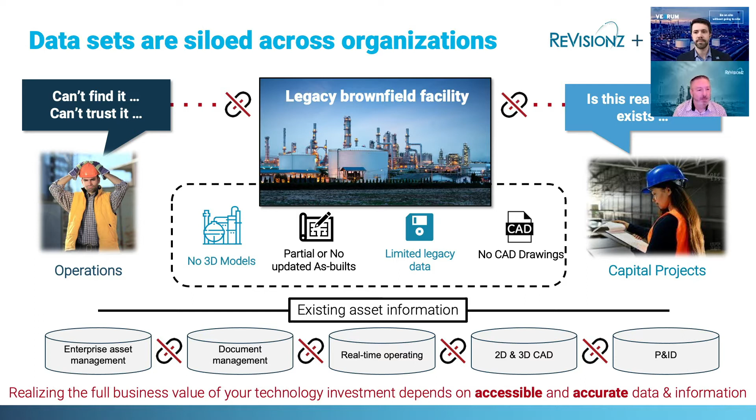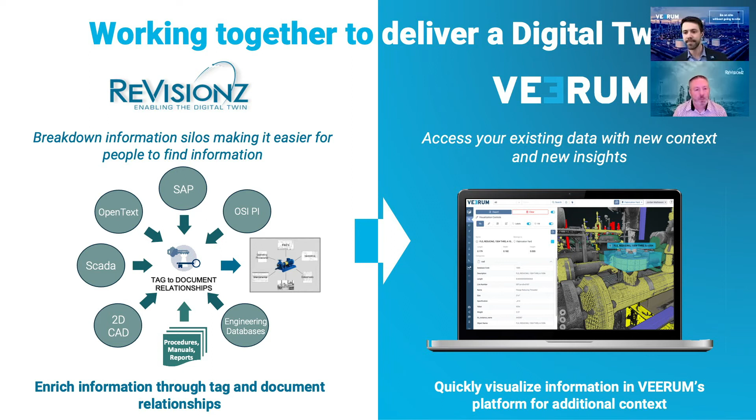Thanks, Alex. So just a couple more slides here, and then Alex is going to give a demonstration, and then we'll finish up with that delivery approach as we've mentioned earlier.

But I just wanted to talk about creating that rich digital twin. In a lot of cases, when implementing new technologies, a lot of companies are conscious of that change to people in their organizations, be it business process change, training to people, their systems or infrastructure, and so forth.

And also in some cases, companies fear, do I have to move or migrate my data to support this new system, right?

So again, I think we've all been part of data migrations. Some experiences are good, some maybe not so good.

The intent of this solution approach is to focus on leveraging your existing digital information or digital investments on your current information repositories, minimizing that change to end users, avoiding that data migration.

With that being said, the ability to unlock the value of your information still requires some work in order to bring it all together and present it back into that VEERUM platform.

So there is an element of having to go through and mine and rationalize that existing data. Where does that existing data exist? How to extract it? How to associate and rationalize those tags across business systems, as they may be described slightly different.

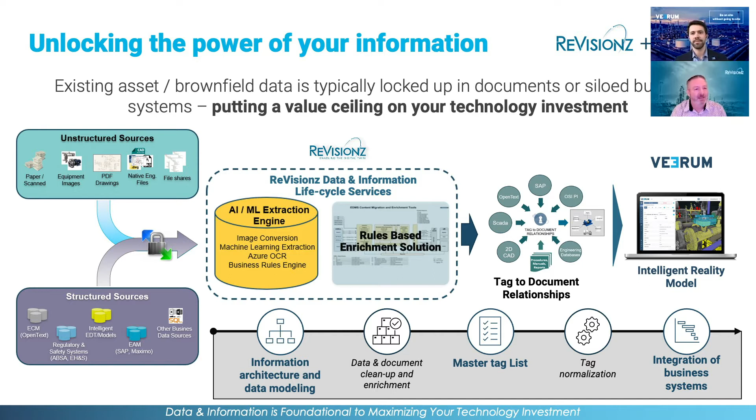So with that being said, let's see what this tool is, what this solution is. Let me pass it over to Alex to demonstrate how he's bringing all this great stuff together.

Alex: Now we've learned a little bit about how we can aggregate data from different systems, elevate that information, and use different AI and machine learning tools to extract the metadata and tags out of these documents. Now it becomes a question of how do we actually connect all of that rich information, which typically lives within document management, enterprise asset management, or real-time operating systems, to a visual model of the plant.

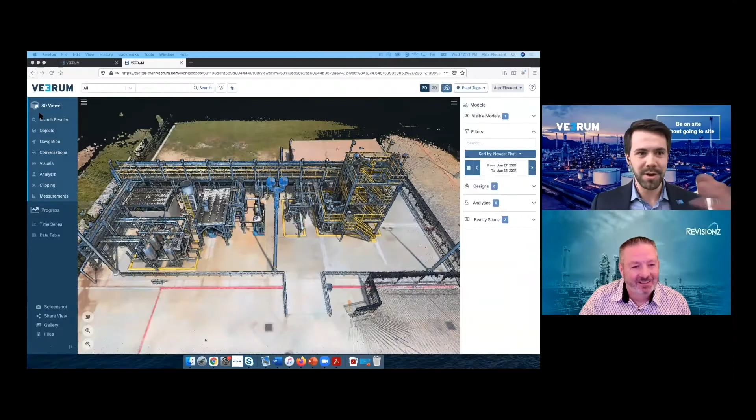So here, I'll escape my screen and show a little bit now. We've extracted all of this information from your document, we ingest your tag list. How do we go about matching all of those tags to related assets or objects within the digital twin?

What I want to show here is a laser scan performed of a water treatment plant, and it's colorized so you're able to really visualize that asset to a high level of detail. This particular data capture was performed using a mobile mapping device. These kinds of devices can scan an entire site in about 30 minutes, and it can be done by non-survey subject matter experts.

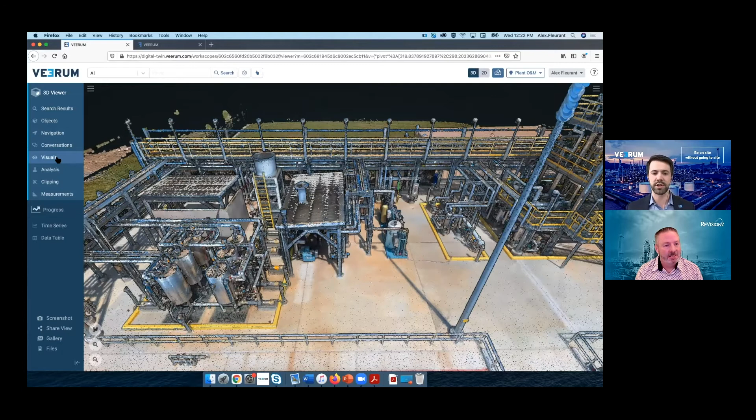So there's really been some great advancements in reality capture technology to support all of these business objectives. What I'll do here is start looking at what we can ingest. The output from that ReVisionz service is a master tag list, here are all of the equipment pieces that we have for this particular asset.

What I can do is actually search by equipment type. Let's say as a maintenance planner or an operator, I specialize in mechanical equipment and want to find all the information related to pumps. So here I've created a search, and now I can see all of the pump tags that show up within this model. There's 17 pumps related to this GU1, glycol unit 1 work scope.

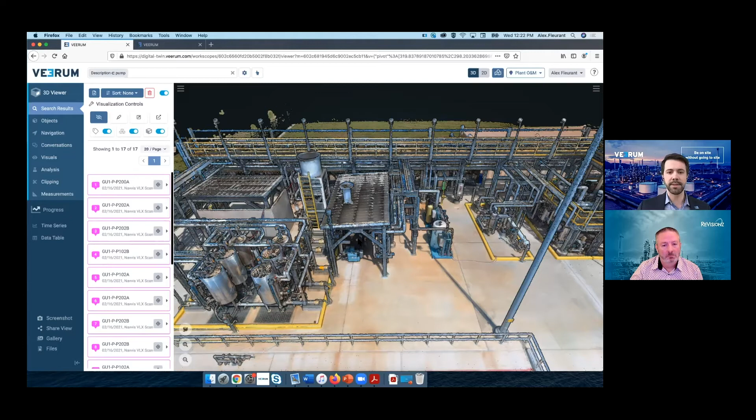Over here I'll zoom into some of these pumps, and we can see that there are pumps here. It's a reality scan. Now what we want to do is start matching each of these tags and objects to the related locations within the virtual model, really advancing that building information model.

So I can click on any of these tags and then get all of the related metadata that comes from SAP or your tag list or your enterprise asset management system, really making that truly accessible and easy to understand for the team. Typically, how we envision this with our clients is crowdsourcing all of this information from your operators and maintenance planners who know that this is pump 201, this is 202, this is 203. But how can you verify that information, or even get non-subject matter experts of the plant, such as myself, to actually start matching these tags?

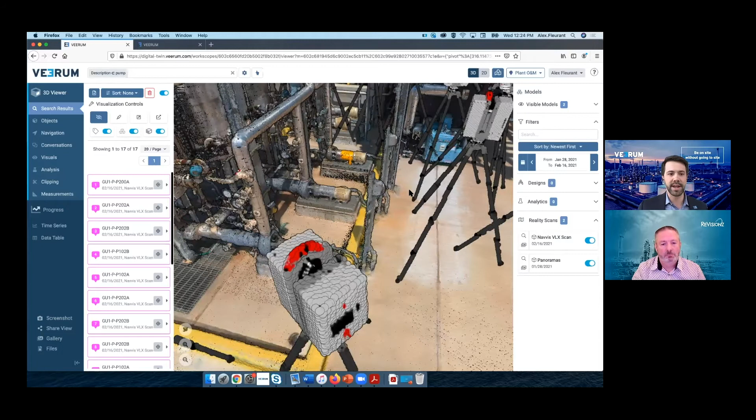So here, as we generate scans, we also generate 360 photospheres. I'll click on one of these scan positions, and we'll be able to access the 360 image from that location. Looking at these pumps, I can see that the pump on the left is pump 201A, and the pump on the right is pump 201B. So I've just got that context.

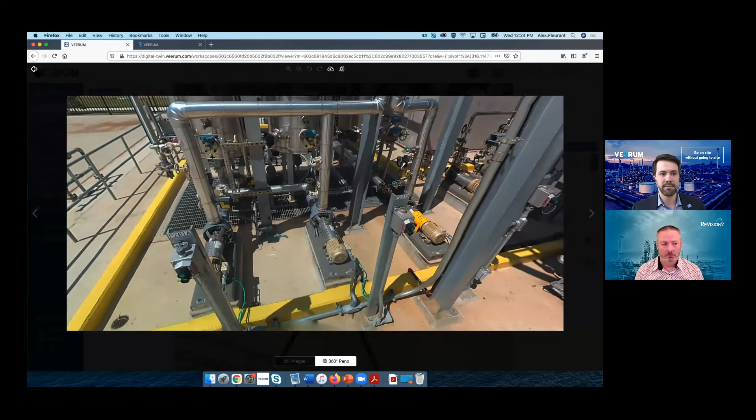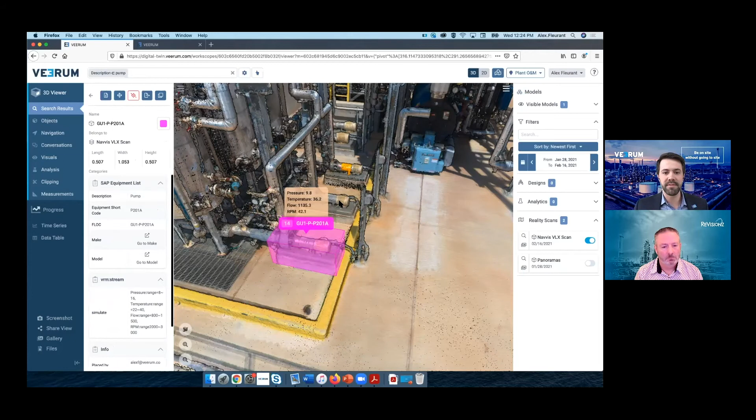I'll clear these panoramas and go back to our tag list to get back to that description, pull up our pumps, and we said 201A on the left and 201B on the right. So we'll find those tags. Again, we can search for these numbers to make it really easy. Here's 201A. We simply select that object, confirm that's where we want to place it, place the object, and we've now connected 201A. I now want to connect 201B, so I'll go back to the list, find 201B, select that object and place it.

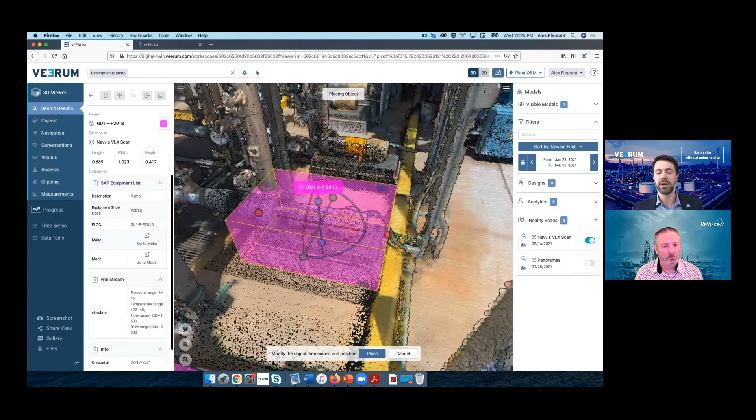Update these dimensions. We can ingest the dimensions of those equipment tags from your system of record. SAP often has dimensions, so we can pre-populate each of those, and again, place that onto the scene.

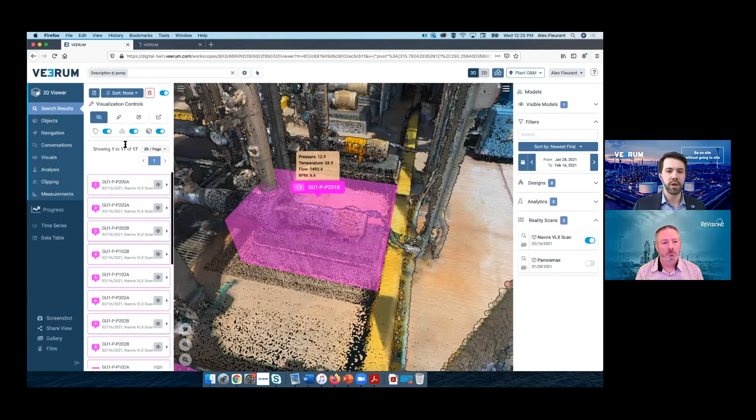Similarly, any other tag or component can easily be matched to a unique geolocation within the virtual model using that exact same workflow. So really what I wanted to show here is we just matched two tags. I can match a third one here. So I know that beside 201A and 201B is 202B. I simply select that object and place it.

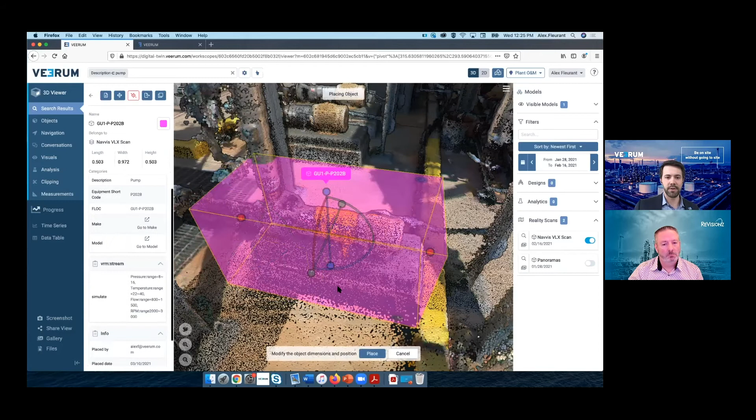And again, what we're really targeting is less than 3 seconds per tag or per object, and really enabling anyone within your organization to take the knowledge that's in their head, knowledge as to which pump is which, and really codify that and build it into the virtual model so it's accessible to everyone, and so that it's fully integrated with your enterprise asset management systems.

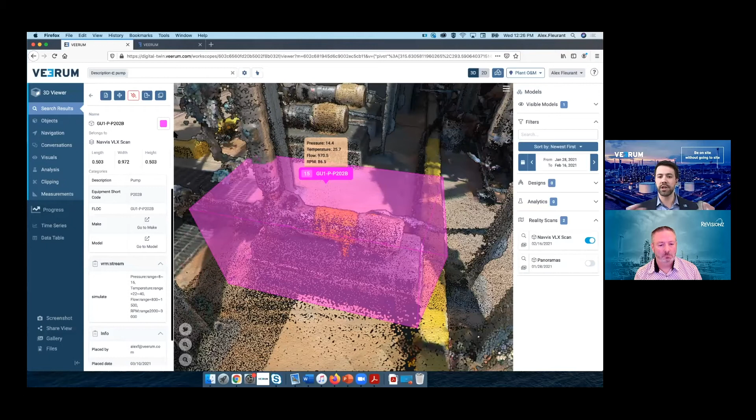The second thing we can do is create sub-hierarchies. So what we can do is create a hierarchy where people, maintenance planners, operators, would match equipment tags to related assets or pieces of equipment within the virtual model, and have some sort of QA/QC process to verify that these have all been matched to the right location, then publish that to a master model, which is accessible to the whole team, that is trusted, verified, and validated at scale.

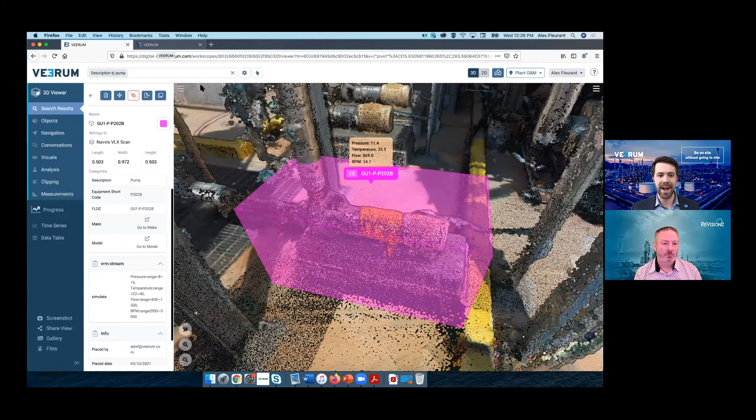So let's fast forward a little bit and see what this looks like for the same plant once all tags are matched. Same plant here, but in this particular work scope, all of the tags have already been matched. So what I'm going to do here is start looking for information.

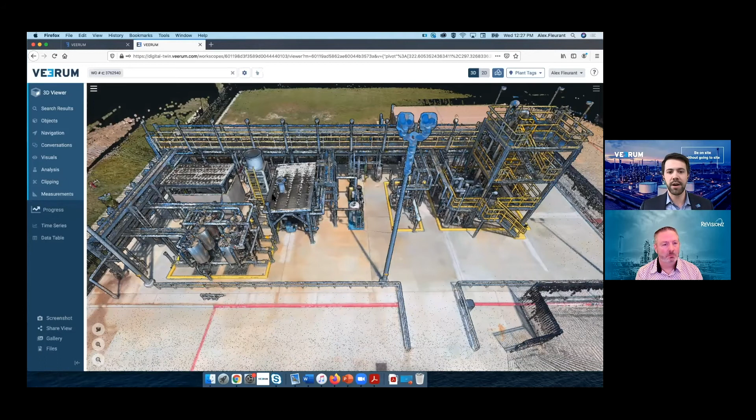So what I want to find, I'm a maintenance planner, I'm about to go out to site, and I want to find a particular work order. So I'm looking for work order 376-2940, and I've just found that work order, and that work order is matched to a tag. So I'll click on that particular tag, and you can see that the work order actually relates to this particular compressor.

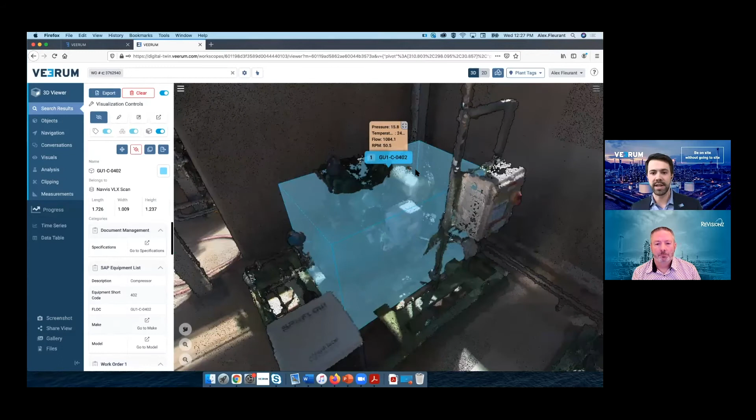And you can see all of the data from document management. We can go to our document management system, so we can create hyperlinks with your systems of record, get all the PDF documents, P&IDs that may exist. This could be OpenText, UDocs, SharePoint, whatever system you may use. And then similarly, pull all of the data from your SAP equipment list, link back to SAP.

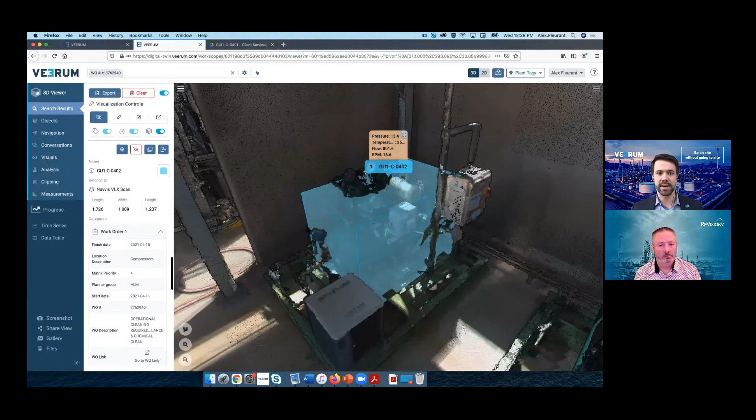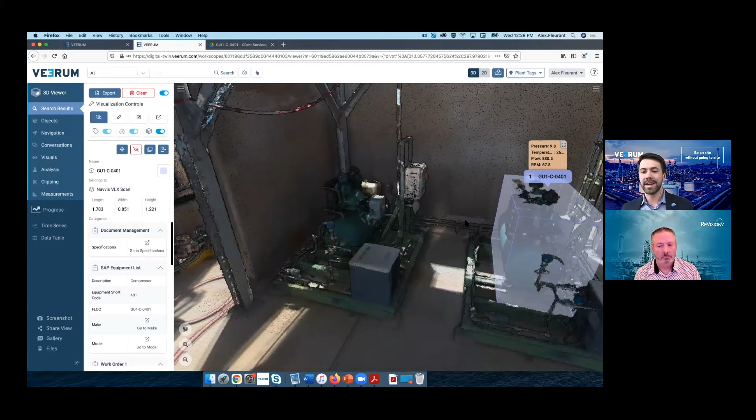Pull all of your work orders from SAP plant maintenance, link back to those work orders, and then you can see all of that particular information. If I wanted to learn a little bit more about all of the surrounding equipment inside the model, I can simply click on any of these pieces of equipment, and I can get the exact same information related to equipment, document management, work orders, or any other information that has been connected in relation to that tag.

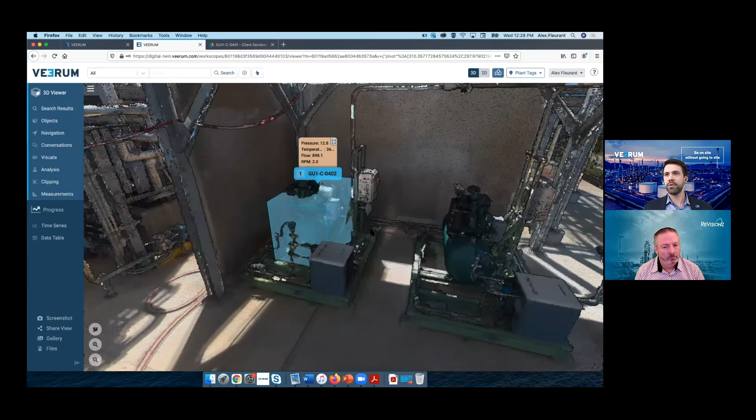So going back to the work order maintenance planner use case, I need to go execute this work order, which is related to operational cleaning that is required of this particular compressor. So now I can actually do all of my planning virtually without actually going on site, and I can really navigate this entire plant from the comfort and convenience of the office or the home office.

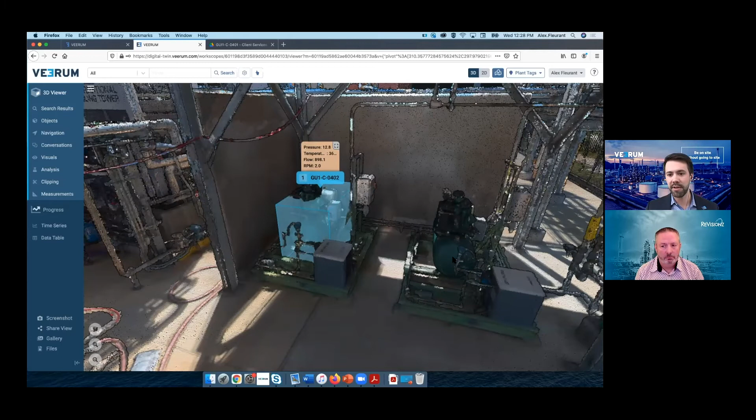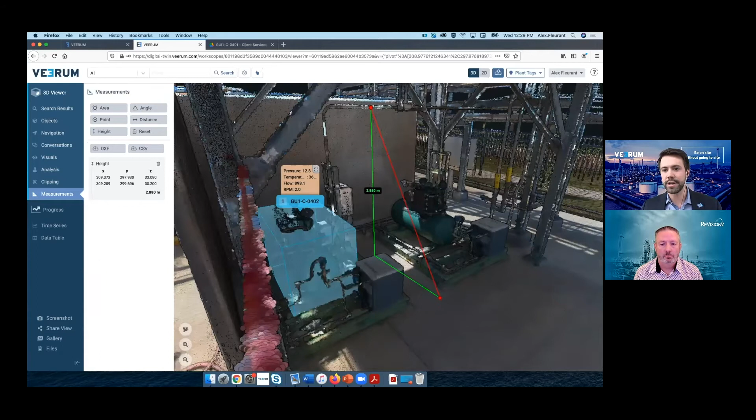As an example, I can start measuring for clearances. So maybe I need to plan for mobile equipment access requirements, and I want to make sure that I've got over 2.5 meters of clearance to bring in particular equipment. Here between this small bore piping and conduit and the ground, we've got about 2.8 meters. We've got some sort of two structural beams over here that are about 2.4 meters apart.

Again, we can do similar clearance measurements and the likes, the type of stuff that maintenance planners would typically do in the field. We're really providing the tools to make that information accessible to people from a remote location.

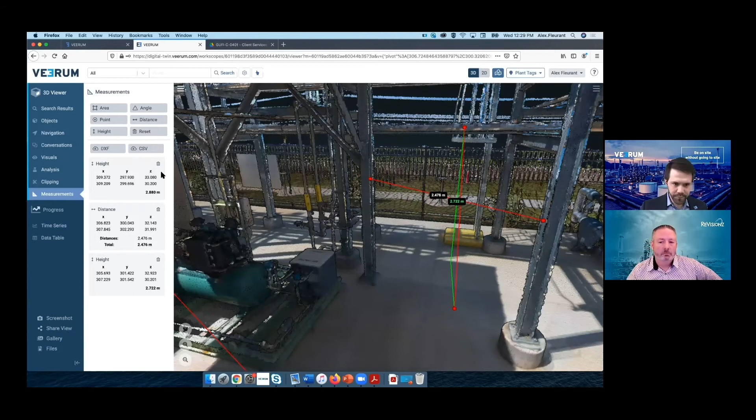The last thing I want to impress upon is that, as we're matching tags to a unique geolocation, really what we're doing is we're giving location intelligence to that information. So now every tag has a related XYZ coordinate that lives within the real world.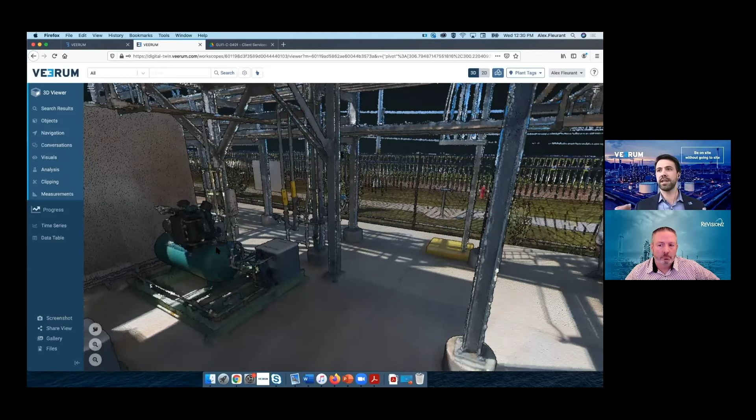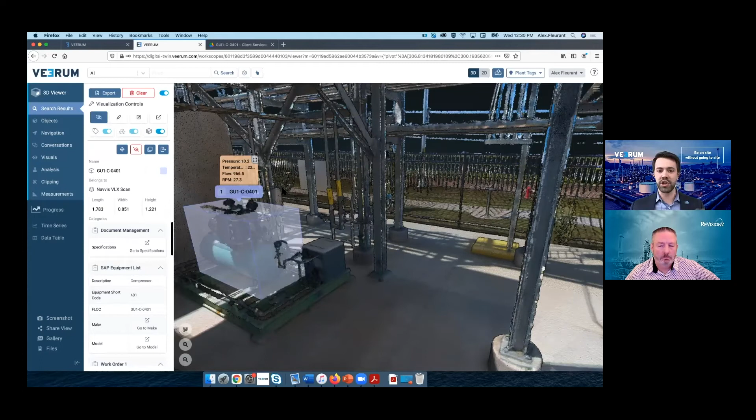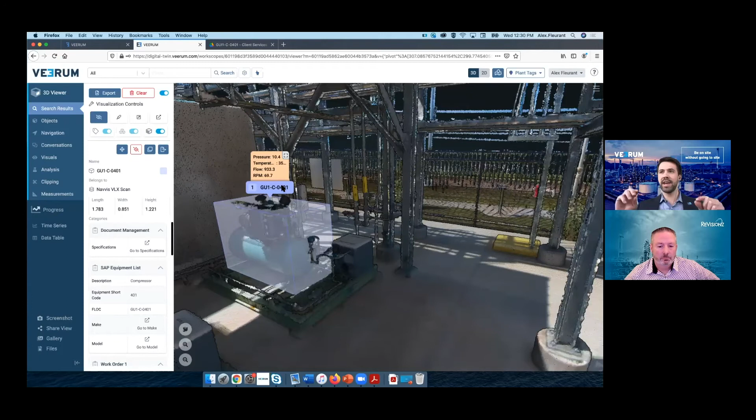And what we can do is we can actually export the XYZ location back to SAP to create a two-way integration. So I know that GU1-C-0401 compressor 0401 lives here. I can export those coordinates, include them in SAP, and create a two-way integration. So I can be in SAP, go to this equipment, and it brings me to this exact location.

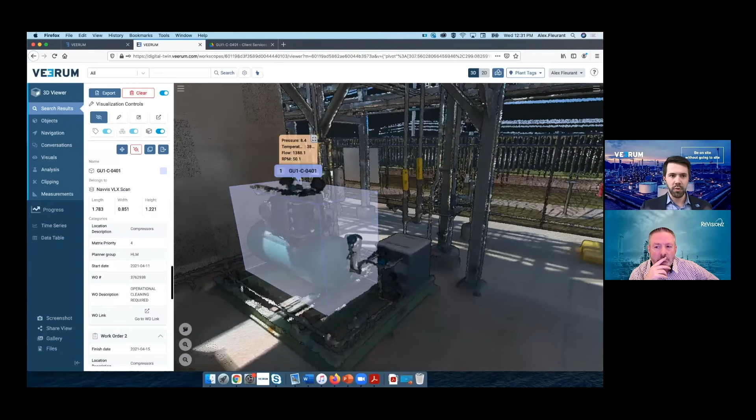So this would look like this Share View. I'll copy a short URL for this particular location. This can be scripted to fully automate the embedding of that URL into your environment. So I'll just go to a new screen. I'll enter that URL, and you'll see we'll reload a screen, bring you to the VEERUM platform, and bring you to the exact geolocation within the model in which that tag exists.

So I hope that came through clear through the internet connection. All of these tags that you have in SAP, all of this equipment list, can now have a new key value pair that allows you to access that unique location within that laser scan or that visual model, so that as I'm planning out my work, I can go to a digital twin of my site, view exactly where that compressor is in the context of the rest of the plant, and really help optimize those workflows.

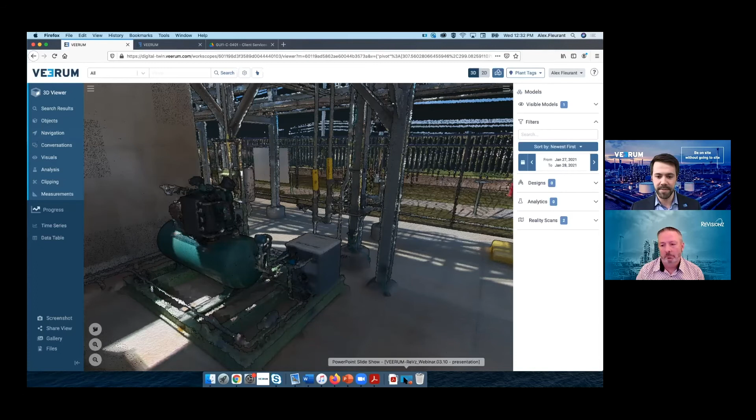So delivering incremental business value. You've seen how we can extract data out of documents, create that master tag list, how we can match all of those equipment tags to a reality scan of our site, how we can create those two-way integrations with all of your different systems of record. So how do you get there, and how do we get there with quicker time to value?

And it really starts with asset visualization. And this comes down to aggregating all of your existing visual data, whether it's reality scans, laser scans, drone imagery, 360 photos. Virtually every company I've worked with has some level of scans inside their enterprise, but typically all of those data sets are captured for one purpose and one purpose only, and they live on someone's hard drive, on their desk, and it's not really accessible to the rest of the enterprise.

So what we're doing is aggregating your existing data, providing new context to that information, and then democratizing access so that it provides greater business value to your organization.

It's worth noting that this space is evolving very quickly. Data capture is becoming a commodity. We're now working with clients, introducing mobile mapping unit devices where they can capture all of this data themselves without the need for survey subject matter expertise. Even the new iPhone 12 or iPad Pro now come with built-in LiDAR, really democratizing access to data capture.